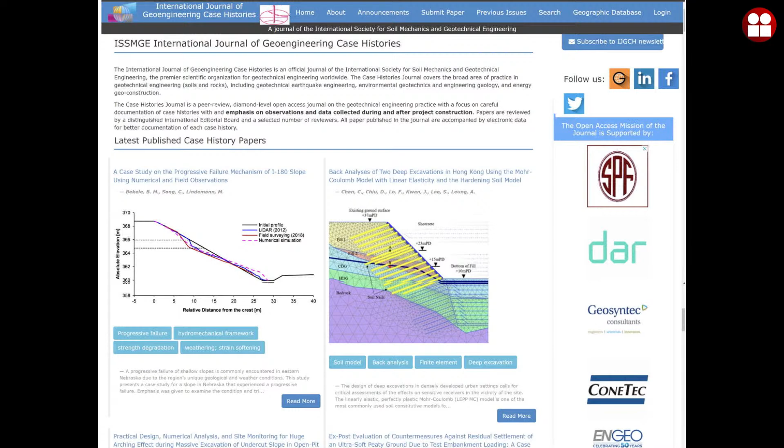Is what you should connect to. The foundation, I have to mention, since many students are here, if you're feeling like going to a conference, especially abroad, don't hesitate to apply for money and support using the application form on the website. The ISSMGE Foundation is there to support young engineers like you.

Finally, a theory that is going to launch this presentation. If you are in love, you have to dig deep into the soul and the heart. And if you want to understand soil, you have to also dig deep. So, for me, soil is love.

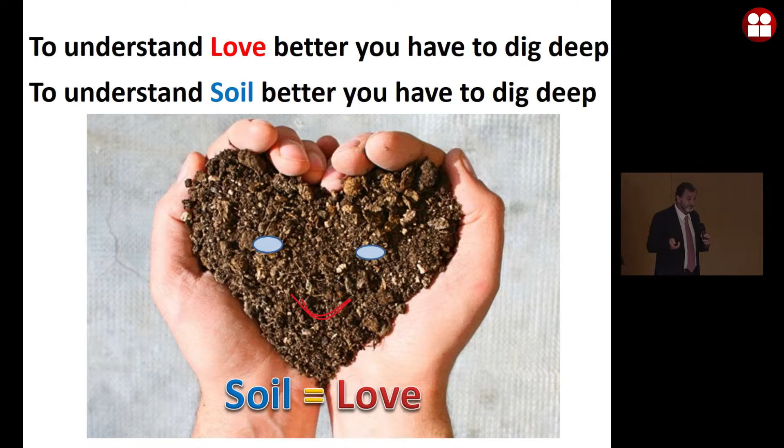Yes, it's fun to be here. Let's do the serious stuff. Not very serious, I will entertain you a little bit.

Geotech engineering life, I will start with the fundamentals. I will be a little bit slow at the beginning, but it's very important because I've seen so many people, consultants especially, jumping onto Plaxis or software before they think. We are engineers, we are not machines.

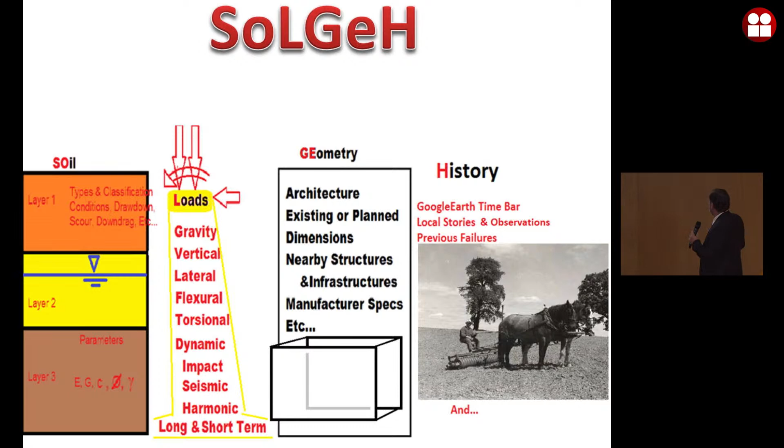And always, always visit the site. As a forensic expert, they send me reports and I evaluate, and on the airplane I have a solution. I get to the site, to the country, I visit the site. I would say 80% of the time, after I see the site, I change my mind and change the solution and change the recommendations. So always visit the site.

The mode, if you can detect what is the mode of failure, what are the theories applied, which software should I acquire and start working, you solve the problem. Doing the actual calculation is not that important. The mind is the most important part.

Please always keep safety at the top of the tripod, which is the most stable solution. So here, you can find a foreman to build a bridge for you, but it will definitely be very costly or unsafe. That's why you study engineering. And it has to also look at functionality.

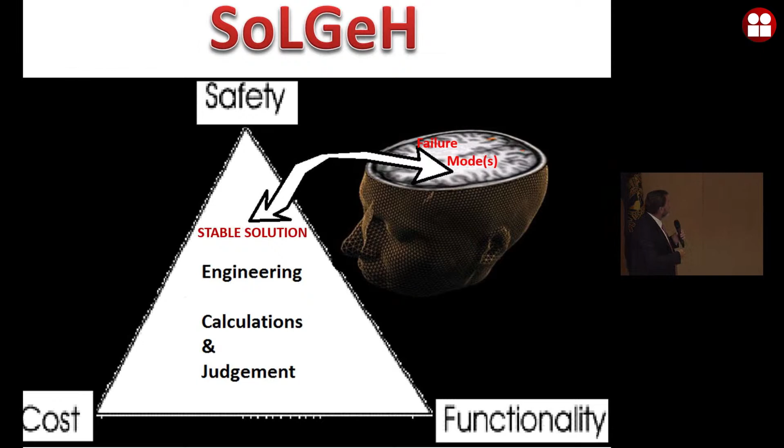I had a problem with a building, a brand new headquarters of a law office, that was sinking 1 millimeter per day in Nigeria. Can you imagine? There was a big company rushing, doing micropiles to stop it. The problem, after I reviewed everything, was that the structural engineer gave the loads in tons, and the consultant designing the foundation never used tons, used kilonewtons. So never ever give answers without units.

I will jump to living engineering, to the simple problem of walking onto sand. If I want to collect soil data, every problem, even this, you consider the soil, the load, the geometry. The geometry is about 230 centimeters square. The pressure, so male and female, about 3 tons per square meter. The history,

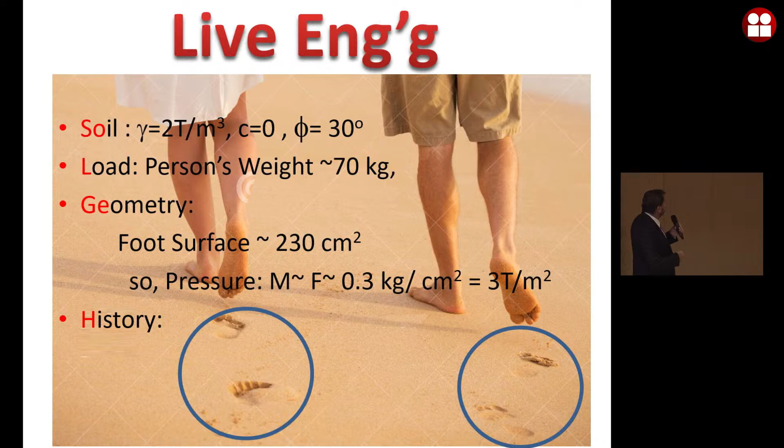note here that the female has sunk or has more settlement than the male. Interesting. So definitely you can say that the settlement is not related to the load or the weight, it's related to the pressure or the stress. So you have to live your engineering, keep observing what's happening.

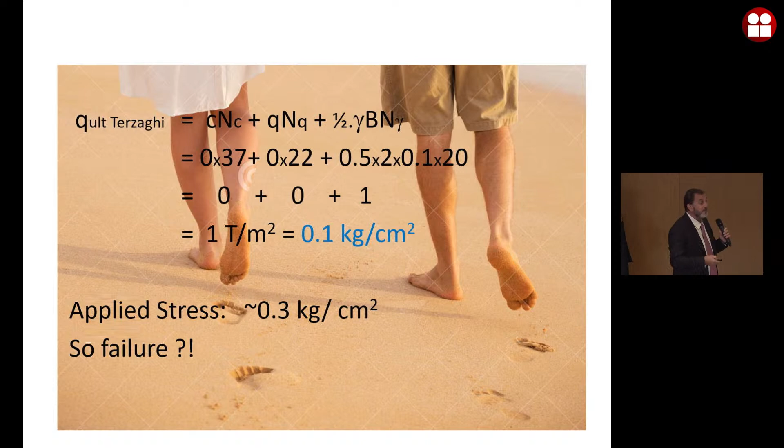Let's apply the simplest form of Terzaghi's equation that we all know, I hope. In this case, 0 for cohesion, 0 for being on the surface. You get an ultimate bearing capacity of 0.1 kilogram per centimeter square. However, you are applying 0.3 kilogram per centimeter square. So you should expect failure, you're 3 times more than the ultimate. But what happened? Is this really failure or what's happening?

So in this case, because it's sand, you sink. And as you sink, if you look at the second term, the 0 becomes a value because you are going deep in centimeters. So it's picking up, this number will start going up and then you reach equilibrium. I will not elaborate too much.

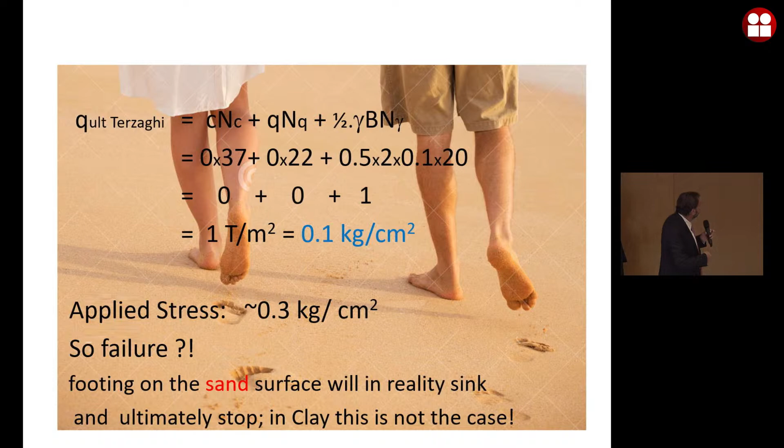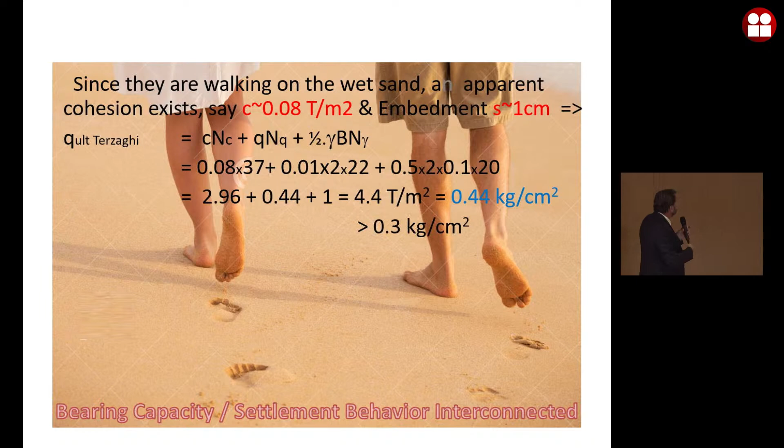It's a simple equation, a philosophical thing to keep going by saying, actually you're walking in the wet area, so you have some cementation from adhesion or apparent cohesion. If we do the math again, this time the cohesion that is letting us build sand castles is pretty high compared to the other terms, and now for sure you don't have a failure. So there is a large effect of suction.

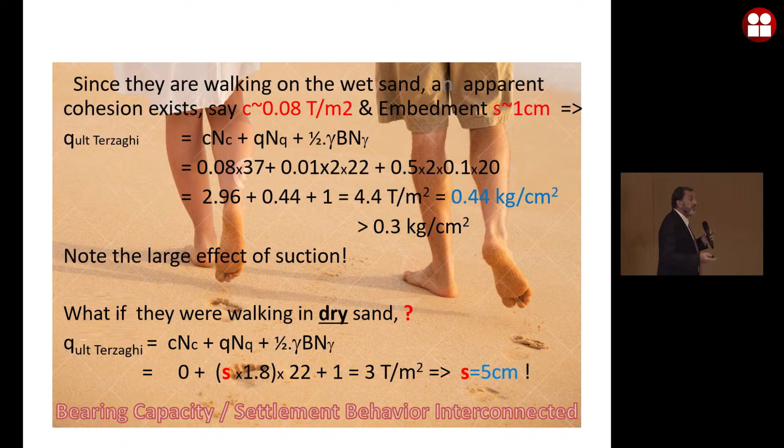But what if we go to the dry sand area? Let's play with the equation, and I want to tell you why we are playing with it. We are playing with the equation by setting the settlement as a variable, and we're trying to detect it using the bearing capacity equation. If you put S as the unknown, you get that you sink in dry sand 5 centimeters, which is logical, right? I'm sure you tried it.

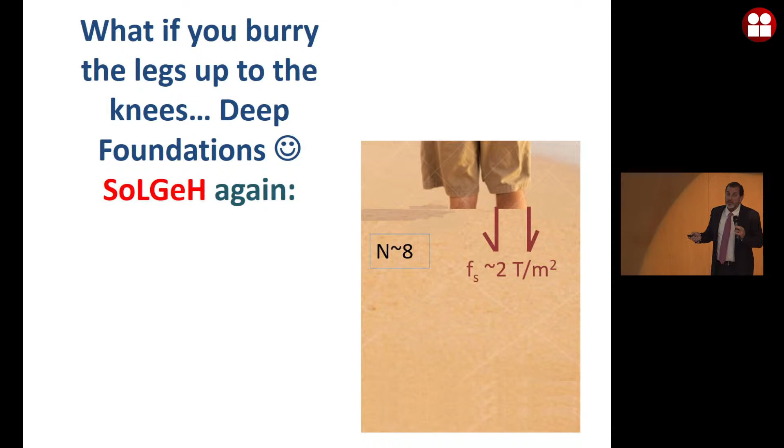So I will jump to deep foundations now. With deep foundation, let's say SPT on the sandy beach, average in the few meters is 8, standard penetration test. This will give us a friction between the pile and the soil of 2 tons per square meter. And I want to ask you a question: what is the force needed to lift you off and out of this agony or this situation?

I will tell you a story of my dad, who is a civil engineer since 1954, and I think he's watching us from Lebanon. One time he receives a phone call in his office. Remember, at the time, no cell phone, barely those phones that you don't remember, but we do. So he picks up and they tell him there is a failure in the trench. They are building a big sewage line in the major city north of Beirut. He said, don't do anything, I'm rushing there.

And he jumped in his car, no cell phones, and as he's driving, one of the workers was buried up to here. His brother is a driver operator of a big backhoe excavator. The brother was so excited to save his brother, so he turns the backhoe, puts ropes behind his brother's underarms, and pulls with the excavator.

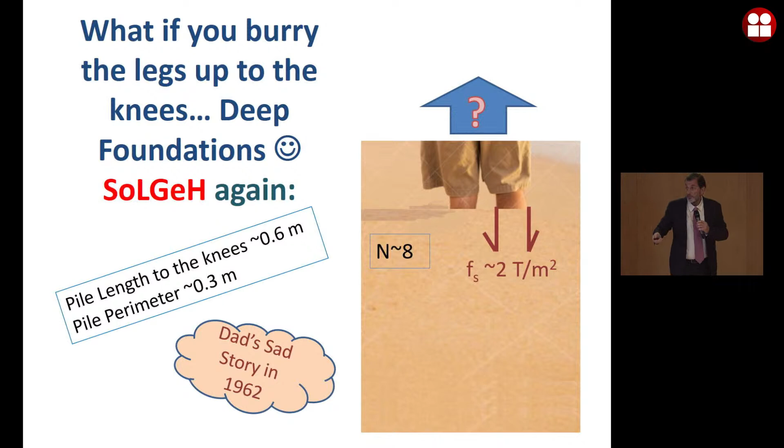And I'm not going to tell you what happens, but you can figure it out by doing the math. Always go back to theory. If you do the math, and uplift is only friction, you get 720 kilograms needed, and he was only buried to the knees. So you can die and split in half.

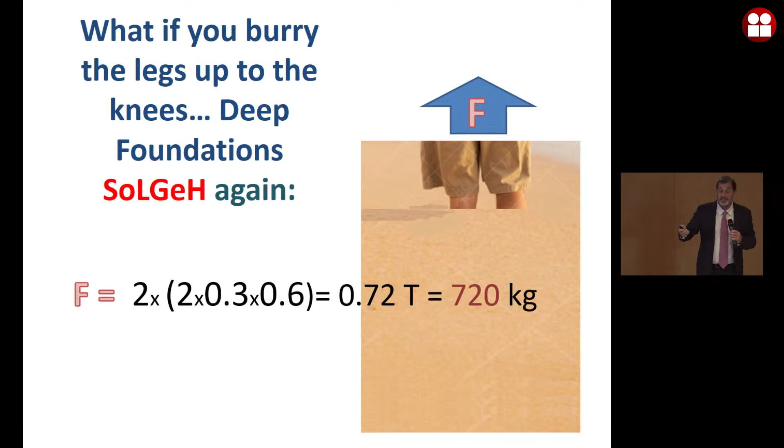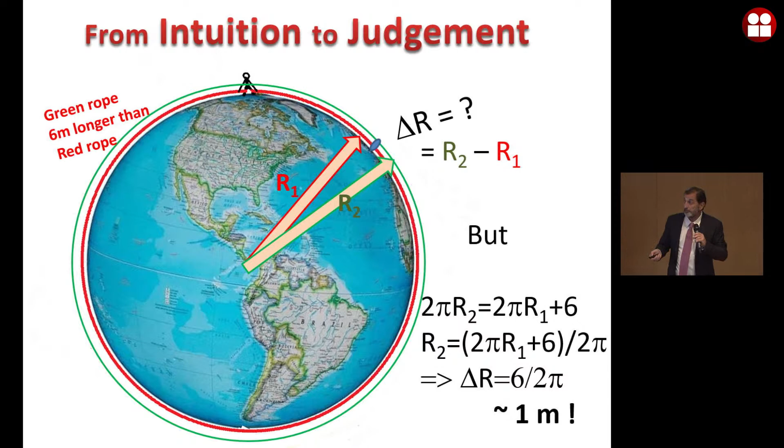Always go back to theory. These are equations that change the world. I need to drink.

Engineering. There is always atmospheric pressure around us, right? Sorry, I need a minute.

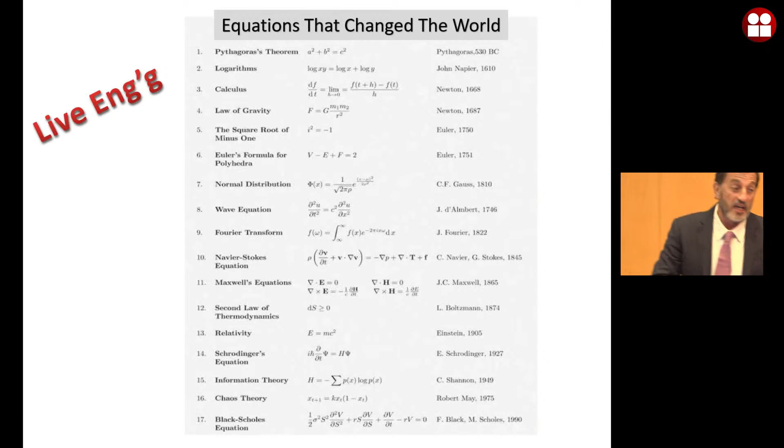Sum of moments, sum of forces around one point are all zero, right? Six equilibrium equations. If I bring another external force, it's earthquake, and then failure. And when it fails, don't touch it. It's stable, same like a landslide. So if it fails, we don't touch it. We go back to theory, make sure we have a safe solution, and then we start working to fix it.

I will move forward. These are the equations that changed my life.

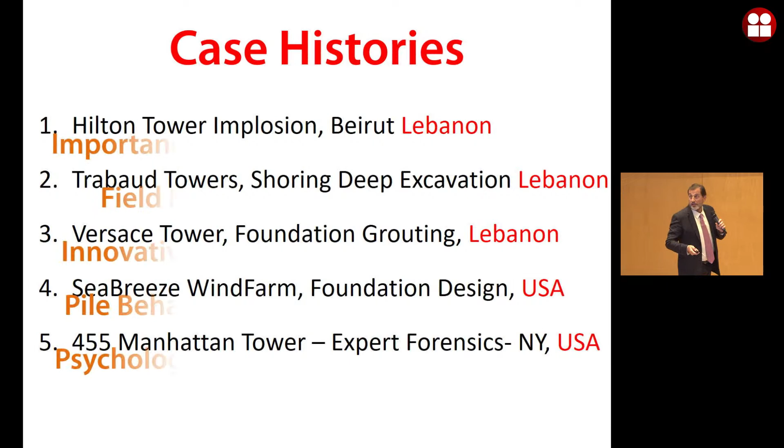Case histories, now we're starting some experience. I have 5 cases, I don't know how much time we have, and each one has some importance to it. I will try to cover as many as we can. I don't know if you can control the time, let me know, Walter.

This first one is a Hilton hotel that was left during the Lebanese civil war. When the war ended after 15 years—it started in 1975, and then reconstruction of Lebanon happened after the peacemaking in 1990—this was a 1997 project. The new client wanted to demolish this building and build a new one, so they did implosion, and you can see it.

My job, if you look here, the blue represents the basements, 3 basements underneath the building. My job was to install anchorage to maintain equilibrium of the infrastructure and the roads around. I don't know if the video will play.

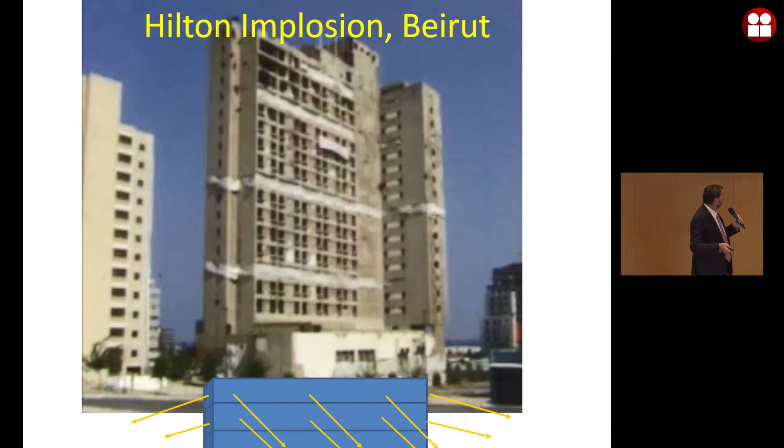I don't know, can you hear the explosions? So as the building is collapsing, my heart was beating because I was doing the opposite, maintaining equilibrium. And you can see me here rushing as soon as the explosion finished to see what happened. Keep an eye on the tower here because it has a big thing to say.

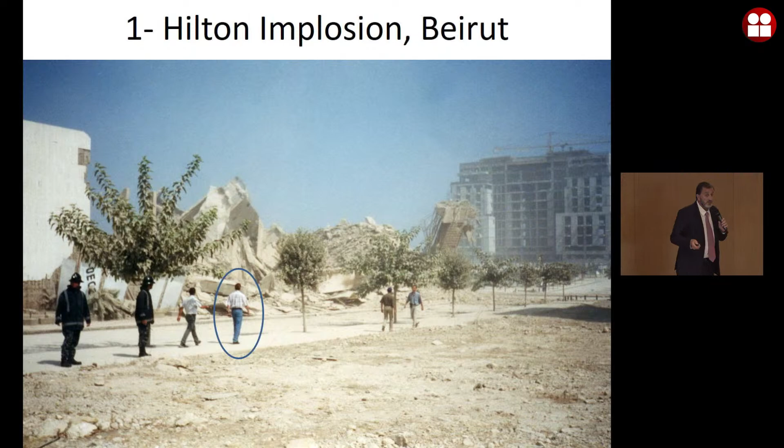Go back to soil. So to design those anchors, I did the soil investigation, but the main problem here was the load, because it was coming from the side. As you can see here, the earth pressure, water pressure, live load pressure, and we had some infrastructure here. But the main problem was what happens as all this load is collapsing dynamically and hitting the earth, coming back to us as a wave and pushing extra acceleration onto the lateral load. That's what I needed to design those anchors for.

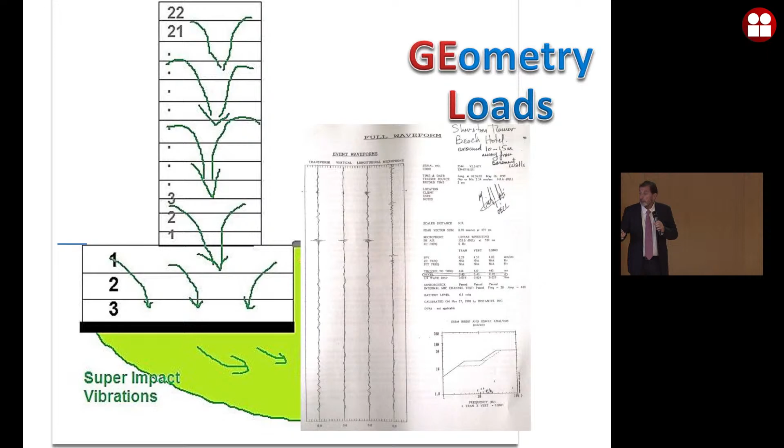To do that, I had to go back to history. Historically, there was the same situation with a building nearby, a slightly smaller building. So I took the data, the time data of the geophones, and the history was my main thing that I used. I had to go back and do the Fourier series.

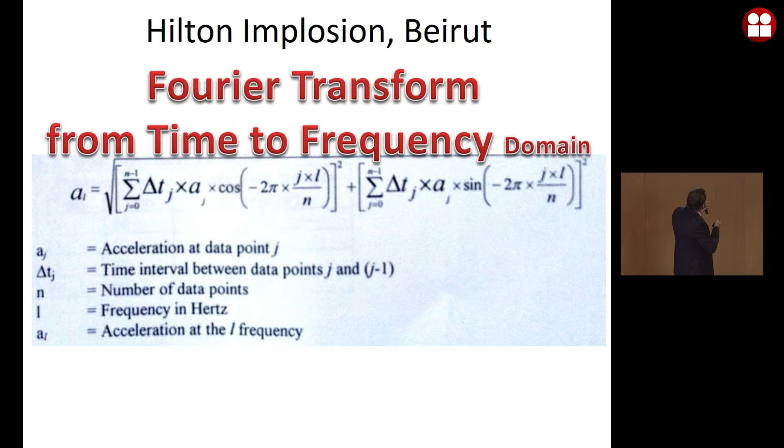By using the discrete form of the Fourier transforms, I was able to develop in the frequency domain both the vertical acceleration spectrum and the horizontal acceleration spectrum. By doing so, I got the maximum acceleration peak. I even multiplied it a little bit more because remember, this is coming from a smaller building. So I felt confident, and I used my engineering judgment, and that's where I designed the anchors using the old RIDO software.

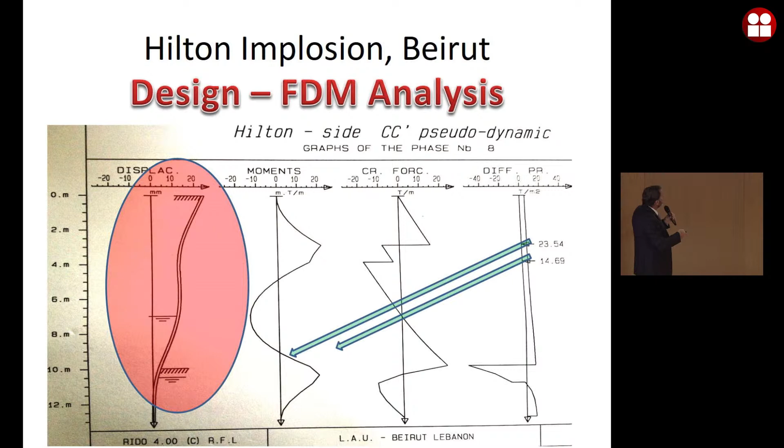I'm going to skip here. This is the details of the design using software we developed in-house, for structural analysis to make sure the structure doesn't collapse.

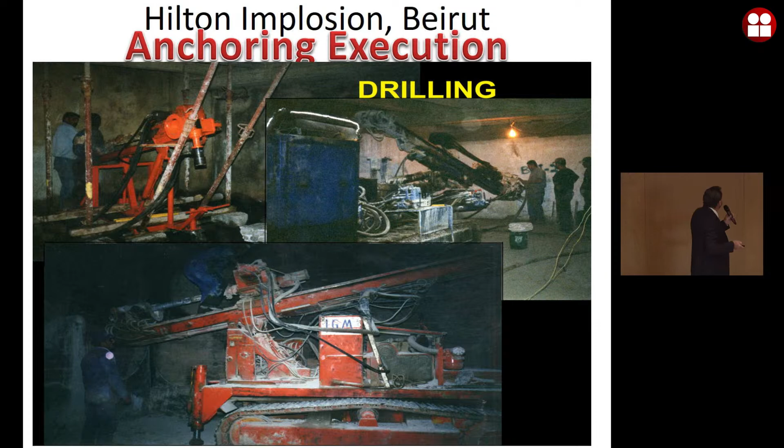And these are pictures that Walter would like: the 3 micropiling machines drilling together for the anchors, and the anchor installation, which needs the mixer and high pressure grouting pumps. We used Clivio Italian pumps, I'm sure you've heard of them.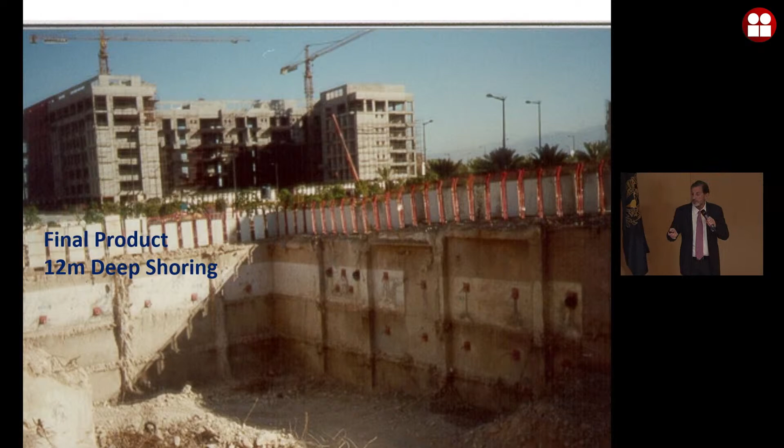And first I said, wow, how far am I? That's crazy - you go from 3 centimeters in one direction to 3 centimeters in the other direction, and you call yourself an engineer. I was so ashamed of myself at the beginning.

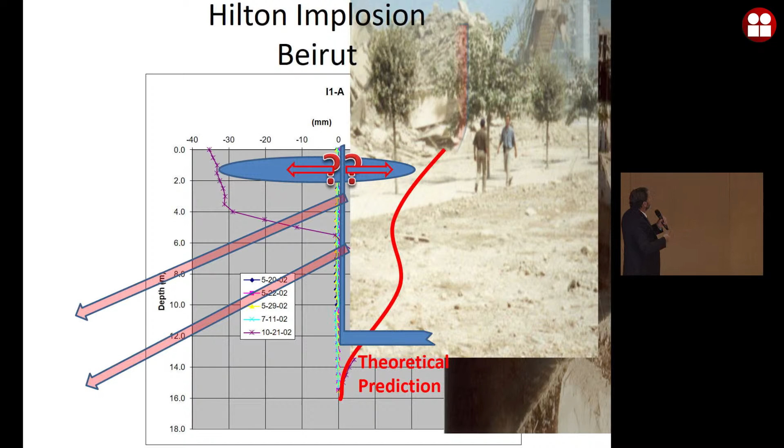So what can you say? Is it a bad design? I don't think so - we designed for the worst case scenario. We were lucky here that at the location of the inclinometer, we had the tower pushing in the positive direction. And this is the birth of the new Hyatt Regency in Beirut.

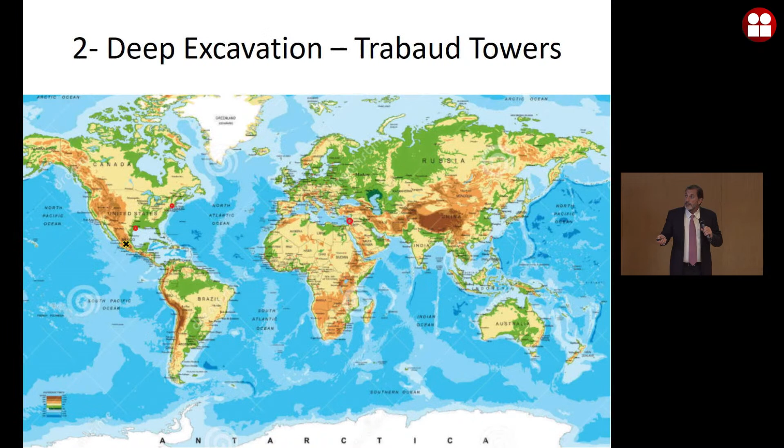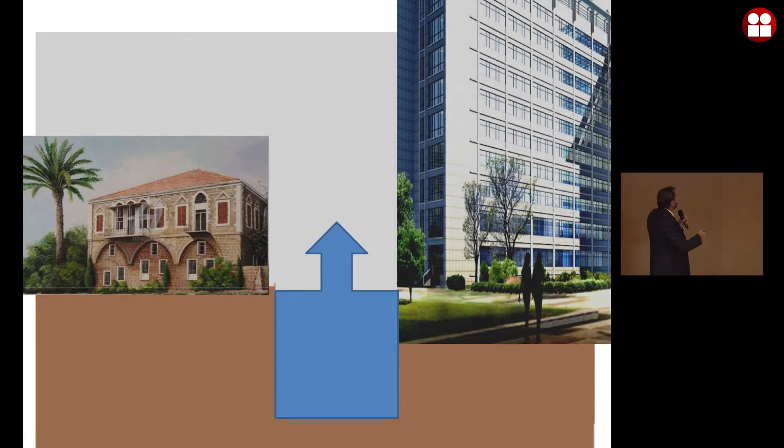Second case is also something you'll like, because during our discussion yesterday I learned that Mexico City has a lot of deep shoring projects and faces deep shoring problems. I want to tell you something here: if you have a new building or an old structure, which one do you worry about? The one to the right has much higher loads, and the one to the left is only 2 stories.

I tell you, I'm sure Walter knows, that the building to the left has no tensile elements to keep it together, and is more dangerous. This is another picture to prove what I'm saying - you can see the foundation is totally exposed from this landslide, yet the tower is still vertical. Why? Because of all these tensile elements. Together, it becomes a block, and only when the center of gravity is outside the touching area will it fall. The same will happen with high-rise buildings.

So if I'm cutting next to a high-rise building, I worry, of course - I design for it, of course - but not too much, from experience.

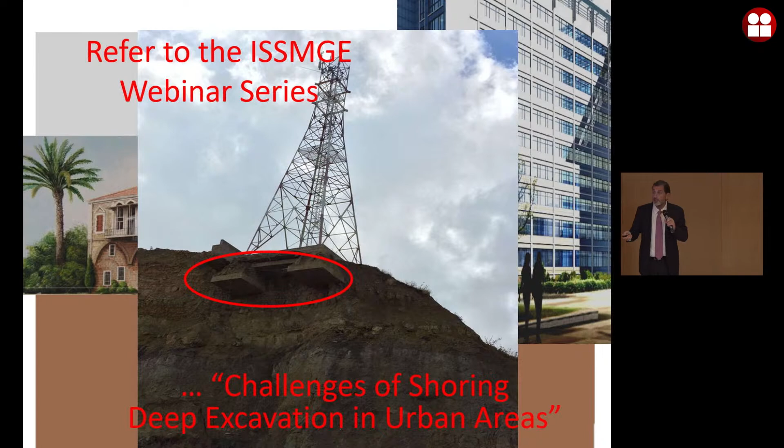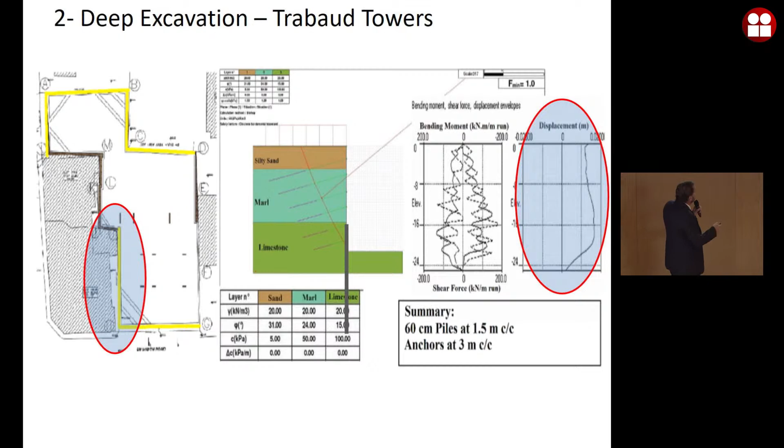And this is the curve that we predicted, the theoretical curve. Look what happened - after 3 rows of anchors and reaching 13 meters, we started seeing problems with the neighboring building.

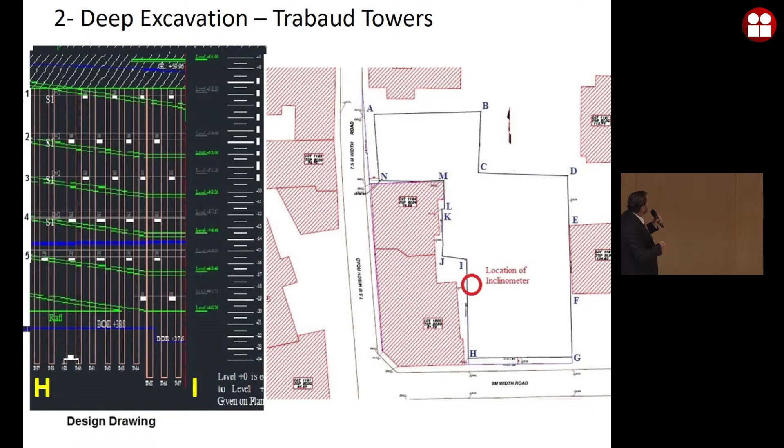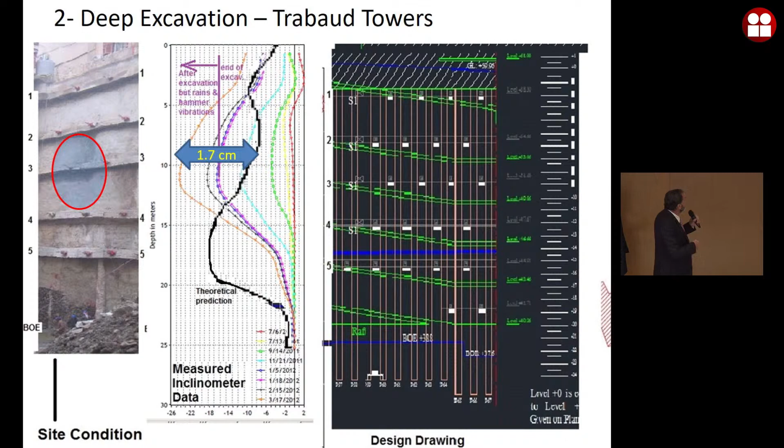Around this area, there was a water source that nobody detected or knew about, and the neighboring buildings had cracks. We started measuring those cracks, and we had to bring back backfill.

That was the fastest way to stabilize that side. So we went back to a new solution: strengthen it with struts. That was the fastest way. And this is the product. When we did that, of course, we put some compression into it.

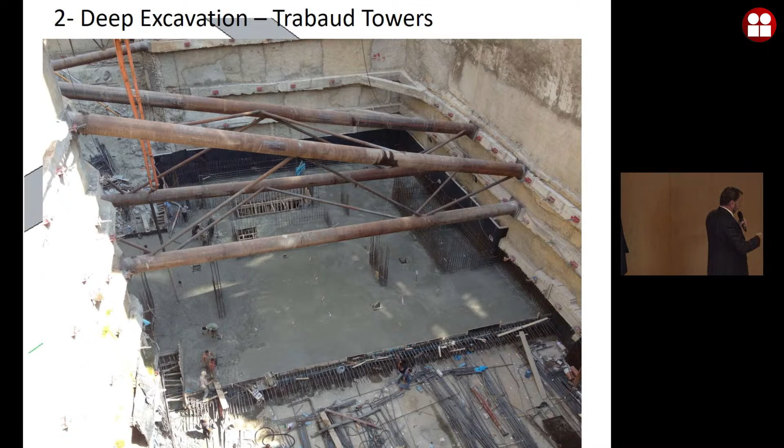This is called an active system, like the anchors. You activate, you pull, you put pressure, so you have reduction in movement next door. And that's the final product of the Trabaud Towers.

This is the building that was cracking. Again, we had to go back to theory and redesign before we were safe. The importance here is field monitoring. Now it's kind of mandatory everywhere you do excavation - you have to monitor all the surrounding structures around you.

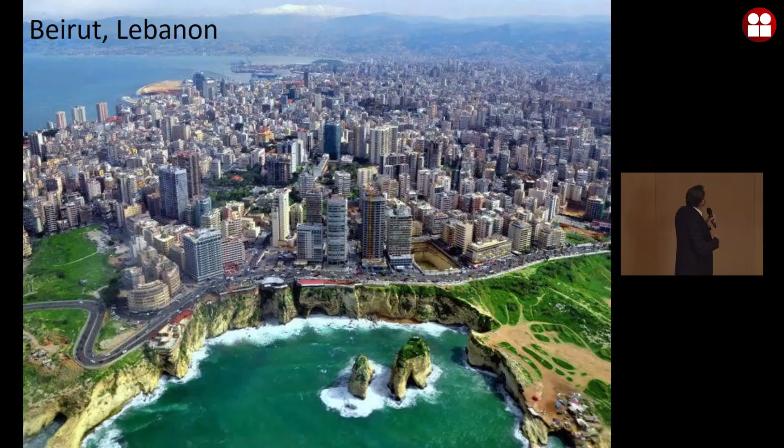Another picture of Beirut, so we're changing case history. You can see the mountains here at the top, Mount Sannine. This time, the Versace Tower.

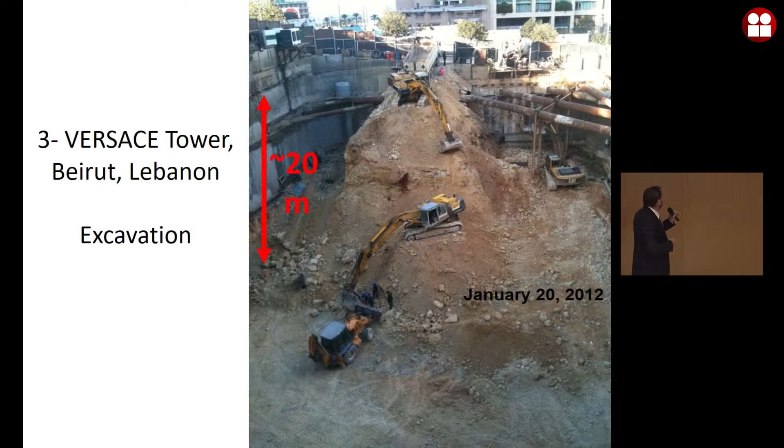The problem was either we go with deep foundation or we invent another system, which is grouting, because the soil had cavities in it, like you see here. It was detected during investigation. The consultant didn't want to take a risk, so he said we put piles. But the soil was marly, so pretty strong soil, and I discovered that this was too expensive.

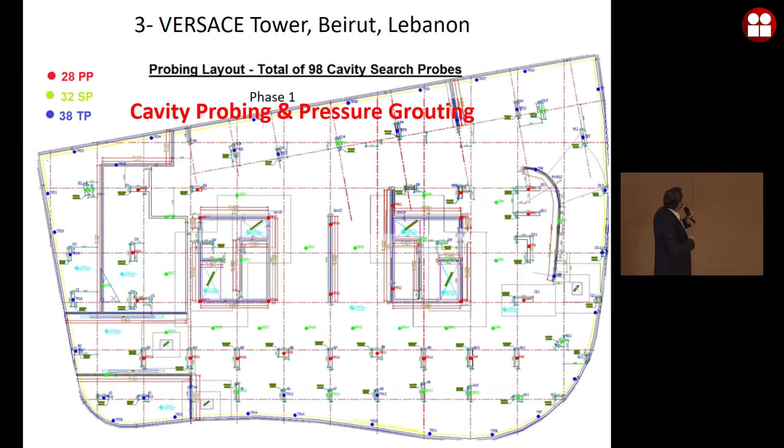So what we did is we studied the pressure on the mat, and where the red zone of the pressure was higher than the soil we removed - if you remember the floating foundation principle, when you excavate, you're removing stresses anyway. So if you put less stress, you don't have settlement.

So we did three sequences of grouting, and you can see here - I like this picture - from different holes, when you're grouting on one, you can see how the water is jumping from the other holes. So these cavities are interconnected.

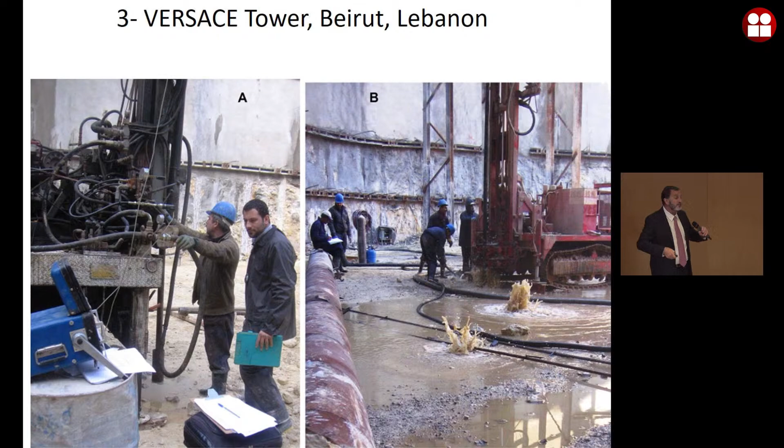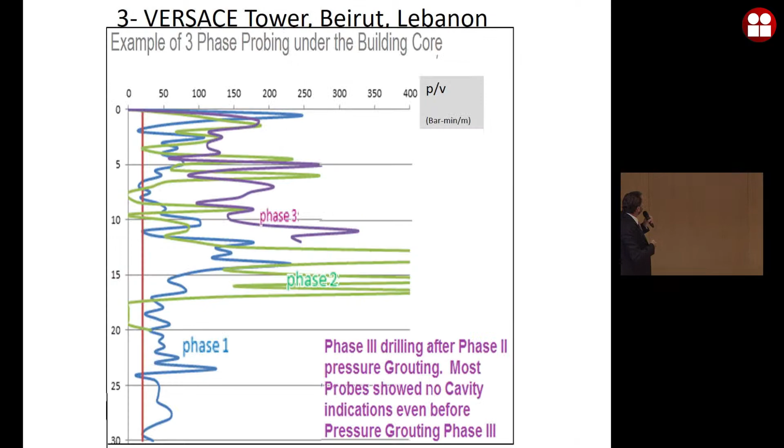We take measurements of the velocity of penetration and the pressure of the drilling, and we develop a system where for each grouting hole, we can tell if there are holes or cavities or not. And we developed those tables.

I'm going fast, I know, but this is what I want to show. Here, you can detect when you are below this line that you have a cavity. From here to here, a cavity; from here to here, possible crack. And that's why, with this theory, you come back and pressurize again and again, two or three times, to make sure you no longer have anything below the red line, which is a typical value of 20.

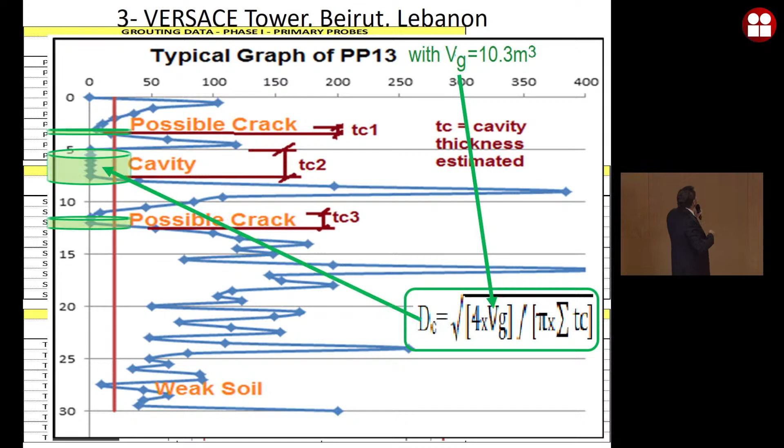After grouting, we ensured there are no more cavities using the theory I showed you, and we saved about $1 million from the piling foundation they had planned for the Versace Tower, which you see here in Zaytuna Bay.

Sea breeze, and this - I think I'll stop after this one and give you the conclusion. Are you okay? Are you happy with the presentation? I don't want you to be bored.

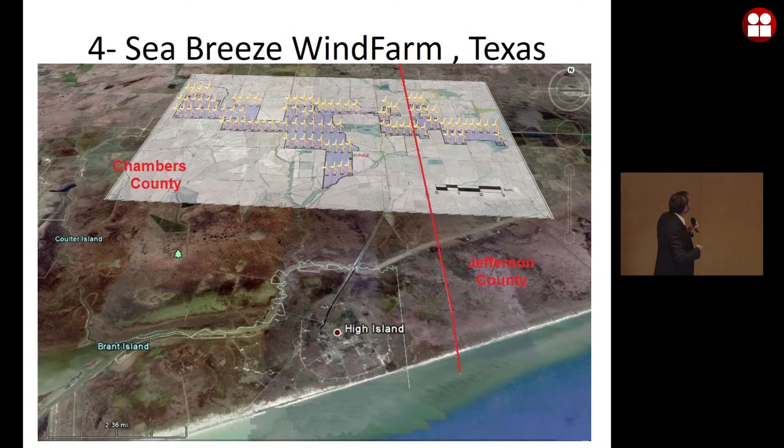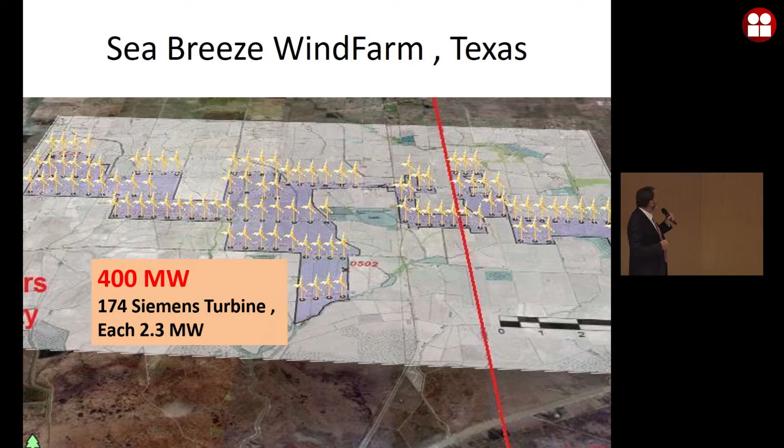This one is a wind farm here nearby in Texas. It's about 174 turbines delivering a 400 megawatt power plant.

We go back to soil always, so we're getting the soil data - CPT, SPT, whatever you can get your hands on. Then you look at the geometry. We have the diameter of the turbine, 101 meters, 120 meters high.

How much does Mexico do of these turbines in terms of renewable percentage? Did they start building large wind farms? Nice, it is the future.

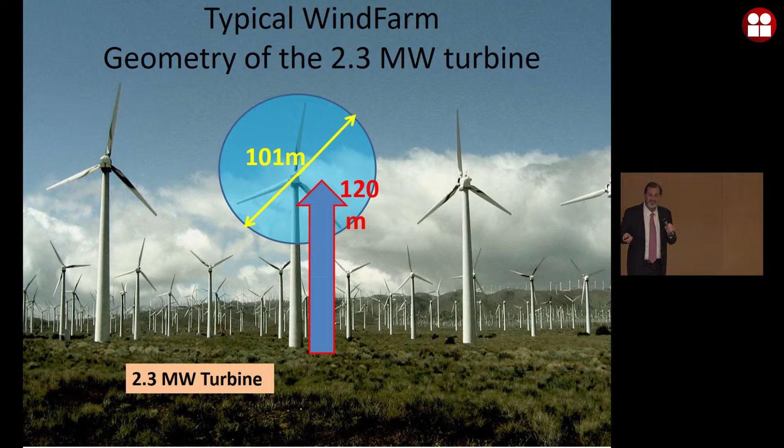And solar. Looking at the loads - so with soil, you have the loads. I summarize the loads under different conditions: emergency braking, lateral high gust winds, the vertical load, and we design for these.

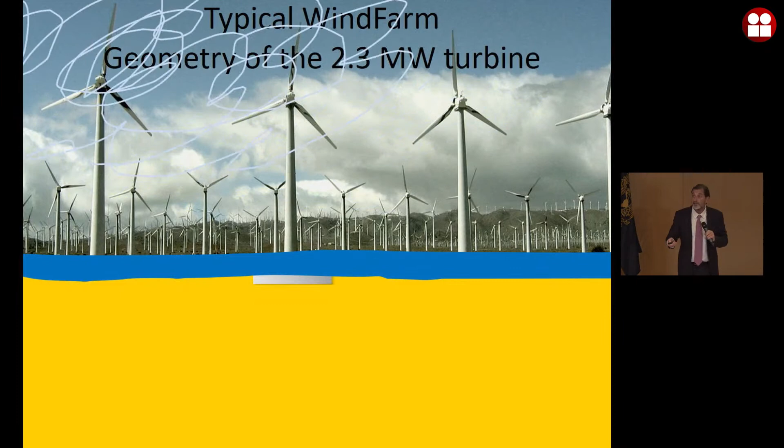Maximum moment, and what type of foundation should we put? Shallow foundation. Besides the gusty wind, we have to worry about surge waves, like small tsunamis coming from tornadoes in the Gulf of Mexico. And when you do that, you worry about scour underneath the footing. So shallow foundation, even though you can build it big, was a no-no for me.

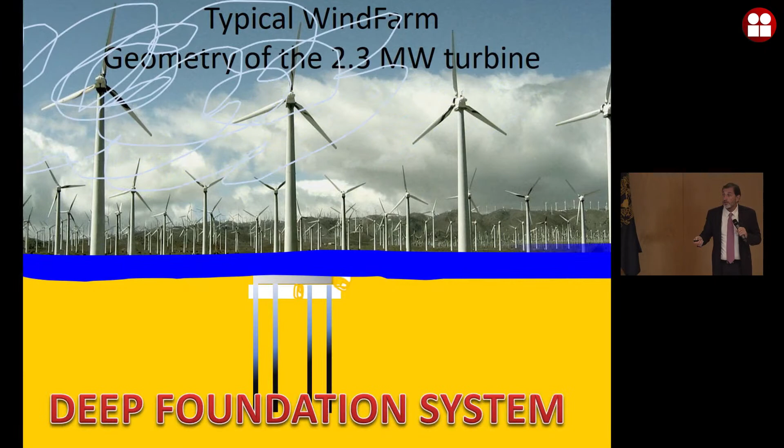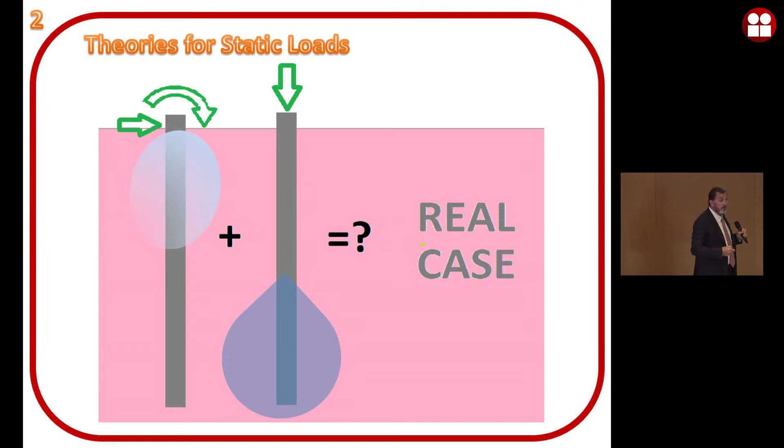So we opted for a deep foundation system. And when we did that, I had to go back to the fundamentals. If you remember, the vertical load affects the lower layers of the soil, and the lateral loads affect the upper layer. It's only in this case that you can add them together in such problems, because the layers of soil are not related to each other, and soil is not elastic. So theoretically, you cannot do that. But because there are different soils in the problem, we allow ourselves to cheat.

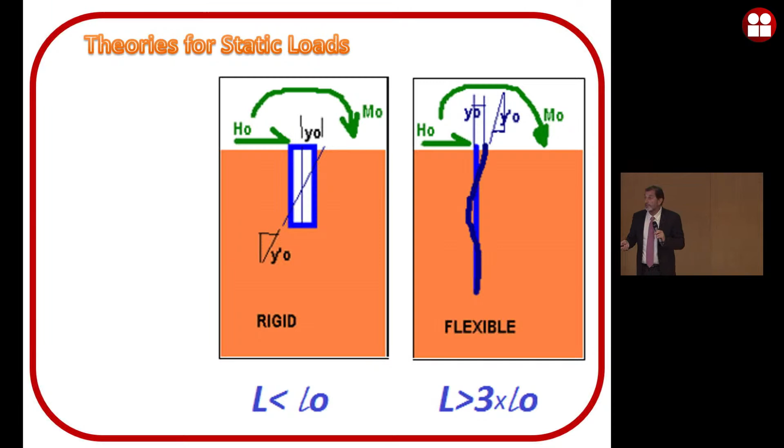When we study laterally loaded piles, we developed the transfer length number L0. If the length of the pile is less than L0, we use the rigid theory, and if L is more than 3L0, we use the flexible theory. L0 is related to the fourth root of E, the modulus of the pile, I of the pile, and the spring modulus of the soil. So it's an interactive value, transfer length.

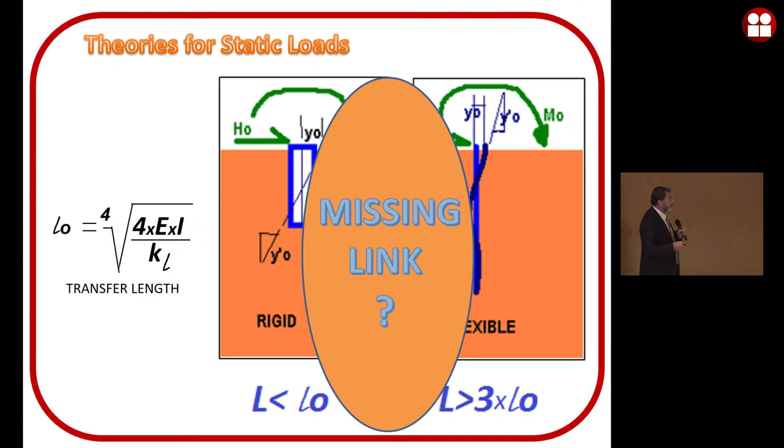I will demonstrate now for you what I mean. You may want to take a picture of this.

Design-wise, we don't want the upper deformation to be more than 2 centimeters, but also the angle Y prime, you don't want it more than 2 degrees for the turbine, and the maximum moment should not break the pile at the pile body. Go back to the theory - that was my PhD dissertation.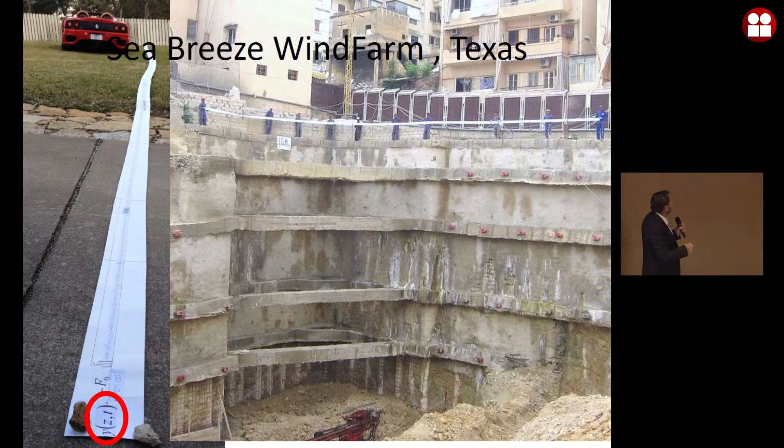Here, on one of my job sites, I made the guys carry the solution equation so they feel what they're doing.

I hope this works. You will see the pile wobbling, and it's in a flexible form. Can you play it from here? Yes.

At a certain frequency of the turbine, as the turbine is turning, this is what the pile is doing. You study the maximum moment, maximum deformation, and you put an extra safety factor on that.

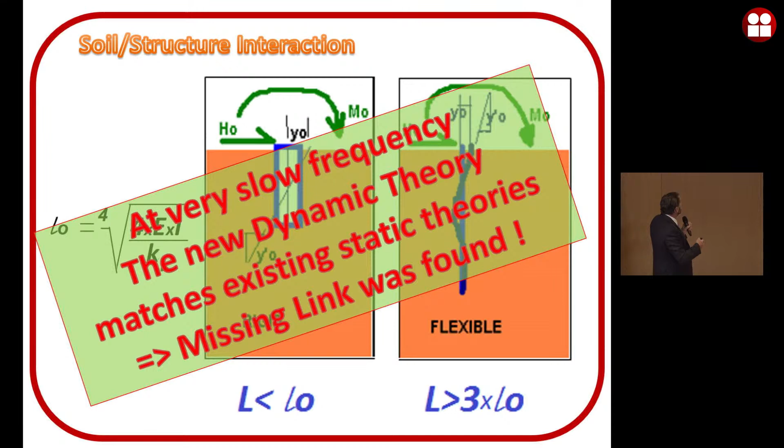What we discovered with this equation is that there's a missing link - you cannot interpolate between the two, like the teacher used to tell us.

We discovered this with a demonstration. Can you play this video, please?

What I'm talking about...

If you take any element in your hand and imagine this is the pile embedded in the soil, and this is the upper turbine, and you put load on it, your fingers are your finite element software, discrete element. A nice lady will not be able to bend the pile because her hands are soft soil, and the pile will behave as a rigid pile. The same pile in strong hands can bend as flexible and behaves as flexible.

And this theory - if you look, is it plain? The dash, as we change the variables, the red dash line is the new theory. The blue is the rigid theory, and the green is the flexible theory.

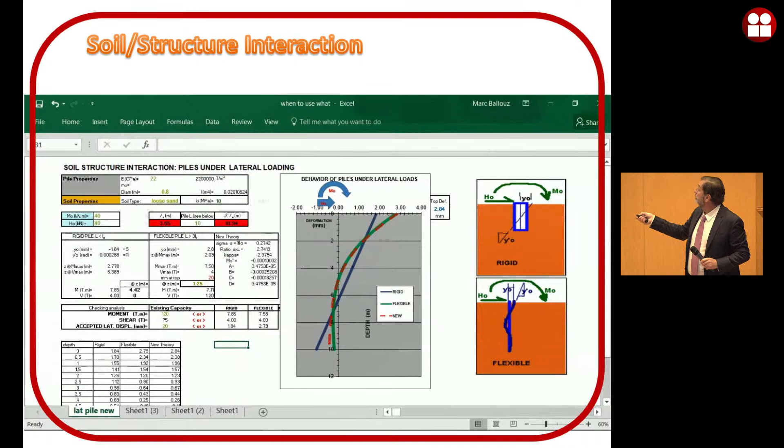If you go scroll up to here, can you see up to here with the... you see the arrow? Yeah, it's okay, we can skip. It's not playing, is it?

It's okay, this is the same demonstration I showed you. So if I put a straw in sand or in mayonnaise, this becomes rigid, this becomes flexible. With the new theory, we were able to solve what happens in between. That was the importance of that theory.

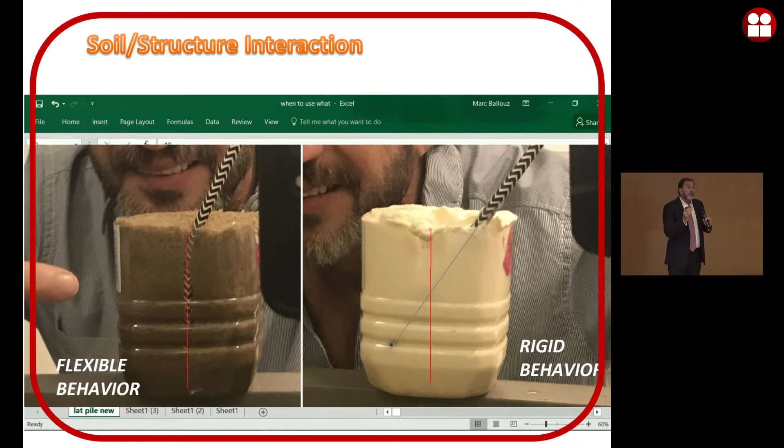And if we play the dynamic equation at low frequency, it matches the static solution.

I will jump now fast to this - this is the solution in 3D using group software, I'm sure you used it, Walter. I like this software. And that was a solution for the Sea Breeze project that is being built very soon.

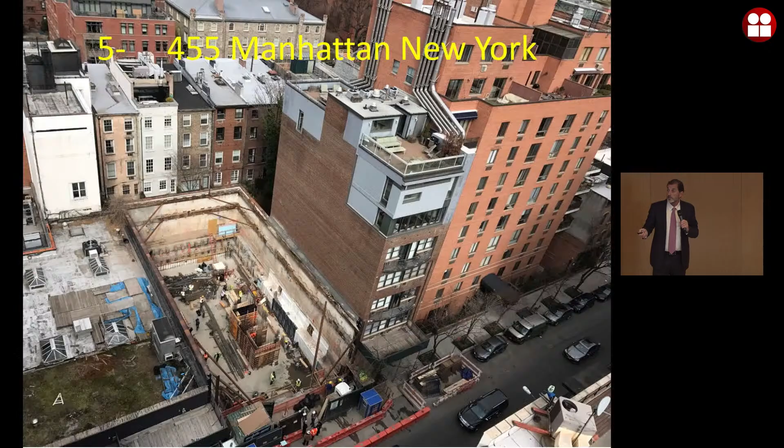I will skip this one because it takes too much time. Well, maybe I'll show you just one slide.

On this project, it was in Manhattan, New York. I was called because the city of Manhattan stopped the works because the neighboring project - the neighbors, as they started working, started moving, as you see in this picture. And the top moved around point P8, 3.8 inches.

There are advantages to monitoring, but also the engineer got panicked and they stopped the project and went to the city, and they didn't know what to do.

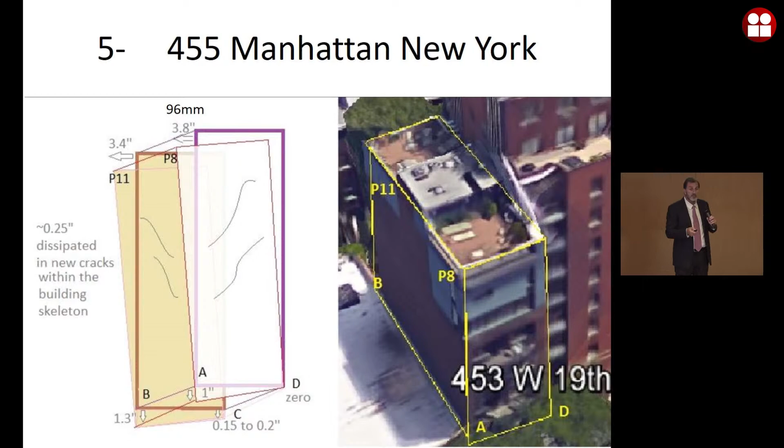And they called me, and when they called me, all I had to do is collect the data. It's amazing how so many engineers on this project did not collect the data and put it together, because the monitoring people did not talk to the consultant, and the consultant did not talk to the site engineer.

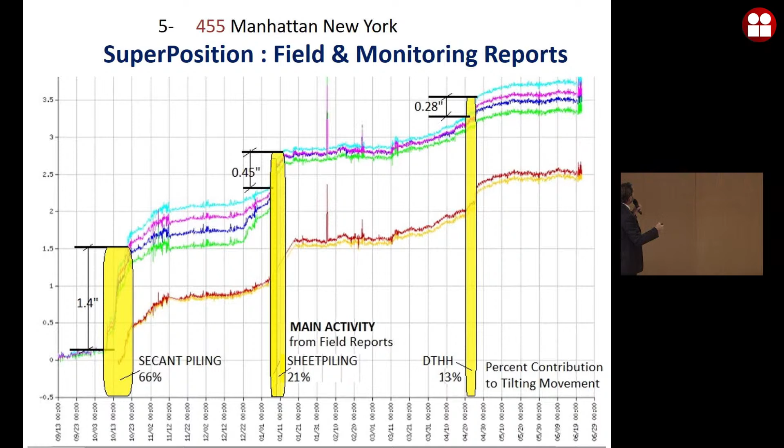But if you put it together, it became obvious to me. Look at these movements at different points, the curves - in yellow was from the site report.

We discovered that when they were doing secant pile, we had a big jump. When they were doing sheet piling with vibration, we had a big jump. And when they were doing down the hole hammering, we had a small jump.

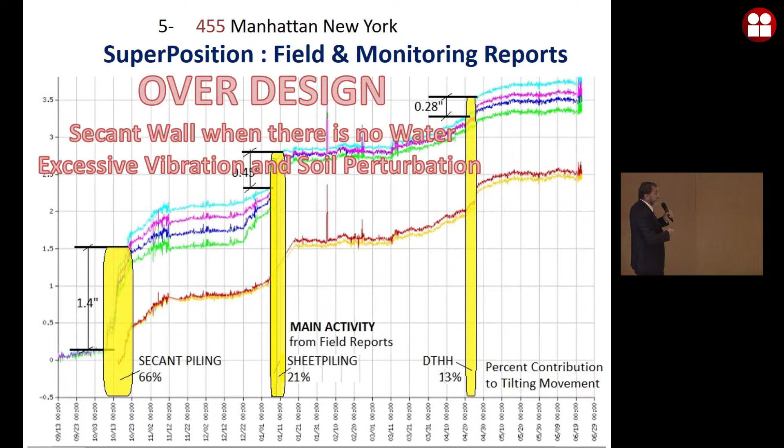So what I did is I stopped the secant pile methodology they were doing and changed it. We stopped the sheet piling vibration, and the problem was solved with zero investment, compared to the client being about to pay $1 million in high struts and micropile underpinning - it was crazy. I was able to convince the city of Manhattan that we would be safe.

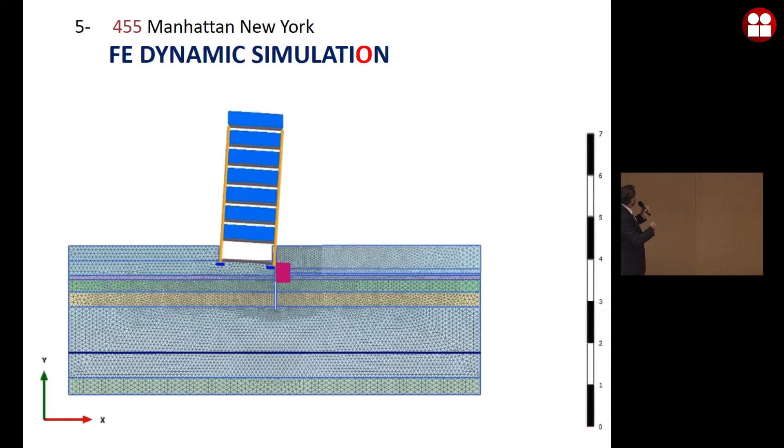Of course, we did some dynamic simulation to see what happens if we keep going, to make sure we stay within the limits. Up to here is what happened, and here is what will happen once we finish the excavation and install the strut.

I had to add a strut system. So you always go back to the theory.

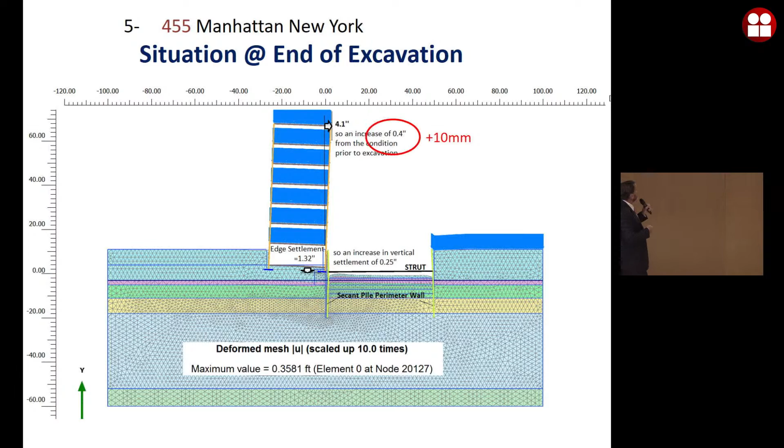I'll jump fast - these are the structural simulations, making sure the building is still safe despite moving 4.1 inches from the top. We detected it can move up to 7 inches without any problems.

Reaching the conclusions - I see many of you already tired. Me too.

Be ready to be international. This means if you are working in Mexico, remember that we have permafrost in Canada, and if you're in Japan, you can go from hot to cold in the same country. You have to be ready to work anywhere around the world nowadays.

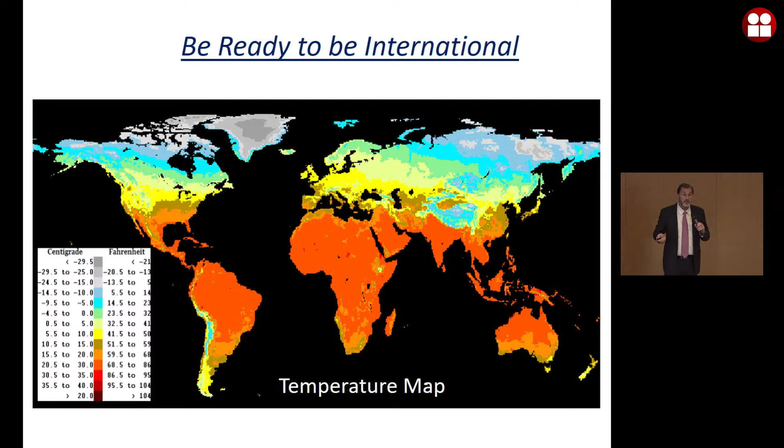The whole world is interconnected with internet, Facebook, Instagram. You cannot say, oh, I'm going to work only in Mexico - this is not going to work. Be ready also to be international.

Be ready for anything, above the table or under the table deals. I see Daniela laughing.

Collect soil data, like we said. Don't mess with the units. Don't rely on intuition - always check the theory. Make sure you use all the theories made available, all the data made available: SPT, CPT, DMT, pressure meter, borehole shear device - whatever you can get your hands on, and use all the theories you can.